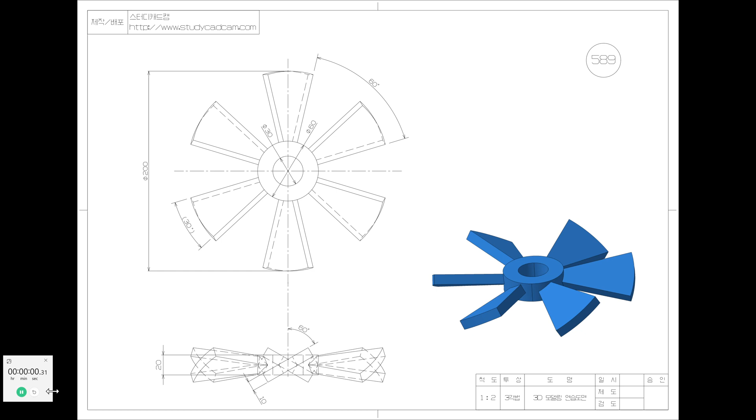Famous last word. I'm gonna start a timer and see how long it takes to do this. I'm gonna press escape and let it go back to regular.

Okay, let's get started. I'm just gonna make it flat on the table surface, and do the outside first, 200. C for circle, 200.

Oh, I forgot to turn on my Carnac. Let me see if I could turn it on now. No, not camera, Carnac. Close that. Carnac. Okay, so now if I hold shift, it's not working. Why is it not working?

I'm losing time here, guys. Okay, I'm not gonna worry about that. I'll try to mention what keys I press. So there's the outside, 200, and I'm not gonna do the inside because I'm going to do that last.

In case as we rotate we sometimes have to deal with this curve, I'm just gonna do everything flat first. So 200, and then this is 60, and how... okay, so that's 30. Let's see which one I want to do. Let's do this one, so I'm gonna do a line from here.

We'll do the center too. We'll do another line, L for line, another L for line, and then we say this is 30. Okay, so I'm gonna just make it 15, 15. Not 5, 15. That one's also 15. Okay, so I got one of them like that.

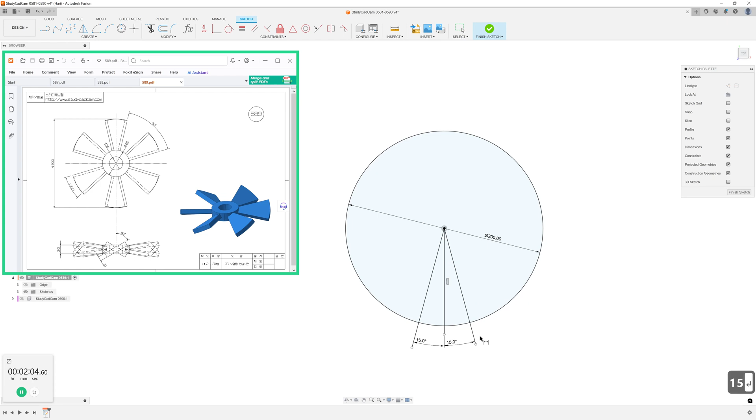And then it is what, 10 tall? I'm gonna press E for extrude, just 10. And since we want it symmetrical, let's make it symmetrical. The total side will be 10, so it'll be 5 on each side. You can see it's split in half there.

So we got that, and then we need to rotate it 60 degrees. I think that's about it. So I'm gonna select this object right there, M for move. We're gonna pick the rotation around this guy now.

Can I move it there? Move the pivot to right here. We're not moving the pivot anymore, we're actually going to rotate it, I guess, clockwise, 60 degrees.

Minus 60, that should look like a lot. Is it really that much? That looks like a lot. Is it 60 degrees? I'm going to try 30 instead. Okay, that looks better. I'm not sure why it's only 30 because that's definitely more correct, like this one here. Okay, now we got one of those.

I'm going to go home again. Oh, we have to do circular pattern. Is it 1, 2, 3, 4, 5, 6? Let's try that. Put this. It is a body, it's going to be around.

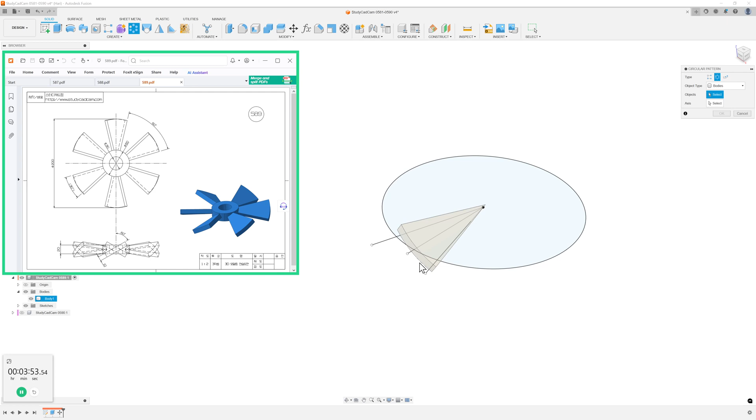Oh, instead of here, did you know you can also select anything circular and it will figure out where the center of the circle is and rotate around that? And we said we want 6 of them, right? 1, 2, 3, 4, 5, 6. Okay, let's see what that looks like. I think that looks right.

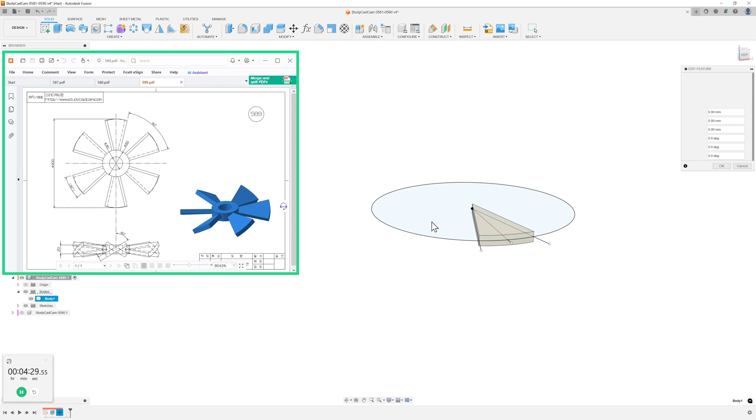Oh wait a minute, oh wait, geez. I think I'm rotating the wrong direction. Let's go back over here and fix the direction. So instead of going that way, we need to go the other way. We'll bring it back to the point here again.

And we're gonna rotate it again, this time the other way around. How much do we want to rotate to get it back? Is it 60 then? I think so. So it's 30, 30. Oh, that looks a lot better, I think.

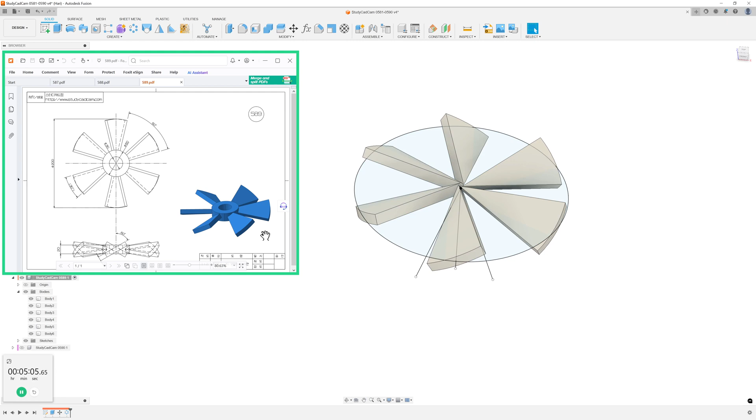So they're going this way, and if you build it you can see it going that way, and here are the curves that we saw. This one doesn't have a... let's play like that. Okay, that was the quote unquote hard part.

So all we have to do is put this little circle in the middle. You can go back in here and redo this, and it is the 30 and 60. C, 30, C, 60.

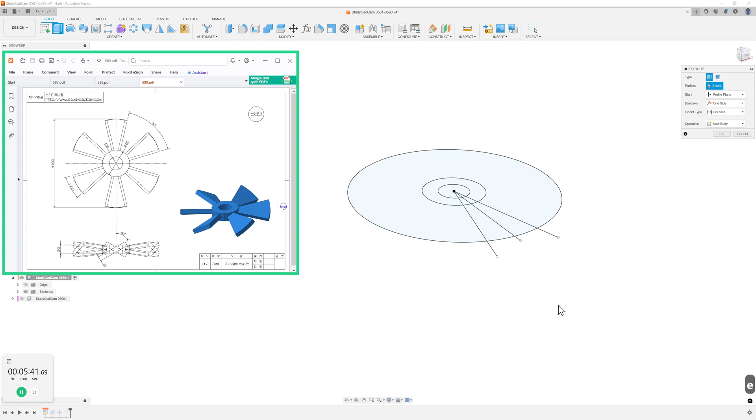E for extrude, I want to go back to where I was before. Go back over here, and so we're going to do E for extrude, I'm going to extrude everything, and it is 20 total. We're going to do the same symmetric thing.

And we want to do the join, that's okay. And then we have to cut the inside, we want to do the same thing, E for extrude, and hold this down, and eventually it'll let you see through the thing. You don't want that face, you don't want that, you want this profile, and then you want to hold control and add these little snippets of profile.

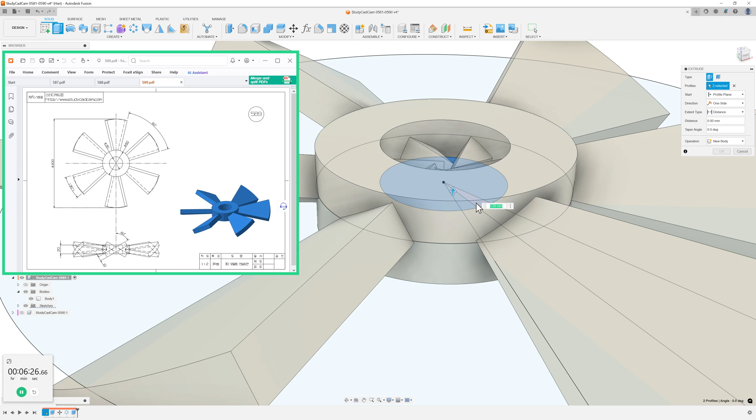And we want to do symmetric again, and this time we could say I want to go to everything that there is to cut, and that should cut everything that's in the middle. And I think we're done.

Yeah, that took what, 7 minutes, with me jibber jabbering and making mistakes. Fusion is amazing.